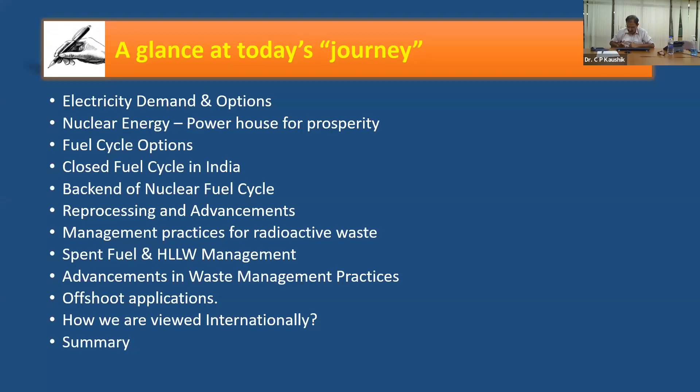And the data which I have taken from our literature indicates that even now 13% of the world population have not yet seen the benefits of electricity. And even in India, we still have 15% of the population. We have to work hard to get the benefits of electricity to reach them. That means there is still a great difference between the supply and the demand.

Maybe just an interesting slide. See, in 2018, coal contribution was 61%, and now the data which I have collected shows that it has reduced to 53.6%. That means that if I take India as one family, efforts have now been seriously put by the Government of India and all together to reduce the carbon footprint by choosing an option.

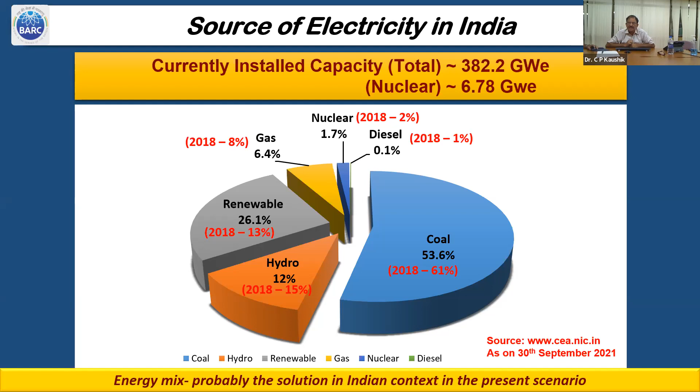And you will see our solar and all, they have comparatively increased. Like your renewable, if you see 2018, it was around 13%, and there has been a steep rise up to about 26.1%. And accordingly, although there has been no decline as far as your current installed capacity is concerned, percentage-wise, yes, there has been a marginal reduction because others like your solar and all increased. So comparatively, you find from 2 to 1.7%, but nevertheless, current installed capacity has been the same, rather it has been a little more than earlier what we had.

Now, again, this slide also indicates the urgent need of electricity. Although all of us are aware, still I thought, let me just show that if we aim at around 9% growth of GDP, maybe a decade later, say now we are in 2021, and if you look at 2031 or 2032, we'll be needing a total electricity of around 800 plus gigawatt electric.

And if you look at the renewable part, to the best of our understanding, we may reach around 250 or so, although a lot of efforts are being put. But I know all my mentors and all the listeners are aware that still in renewable, we have to work with respect to storage, with respect to transmission. I'm talking about the solar part. With the best efforts, the present speculation indicates that in a decade, we may not have a miracle, but nevertheless, there will be a steady increase, somewhere around 250 or 300 gigawatt electric from renewable.

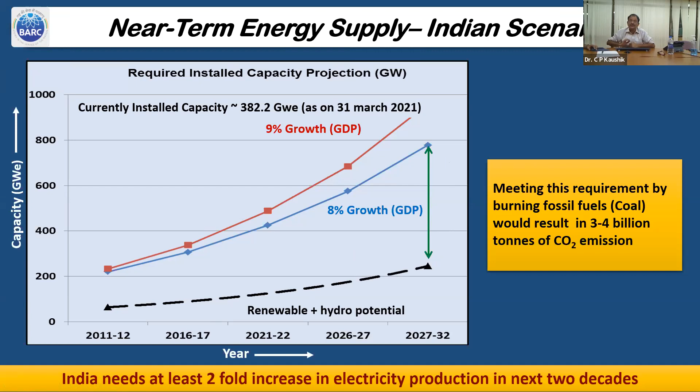So the gap of 800 to 300, from where will it come? If the gap has to be met by thermal, then it is equivalent to pumping around 3 to 4 billion tons of carbon dioxide into the atmosphere. That means a huge amount of carbon dioxide will be getting pumped, and all of us are aware of the repercussions of carbon dioxide coming into the atmosphere, resulting in what is called global warming, increasing the temperature of Mother Earth.

Now, global warming has not been just a concept, rather it is now reality. We have now started seeing the signature in reality. If you look at the first graph and the steep rise in slope in the last some 30 to 40 years, although the magnitude may be less than a degree Celsius, it makes a very clear message that during our industrial revolution in the last 50 years, we are paying the price

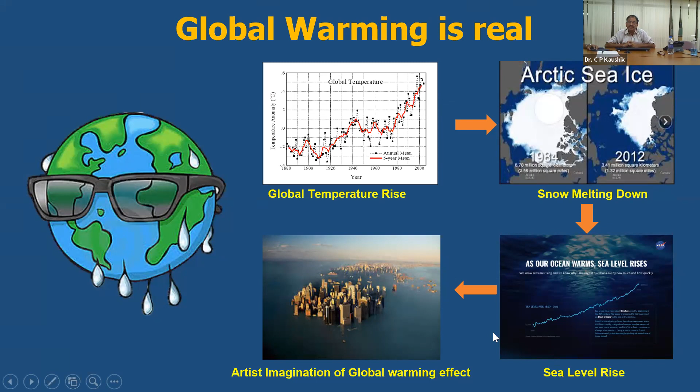of increase in temperature, and that is primarily because we have been mainly banking on thermal power, having more CO2 getting pumped into the atmosphere, which eventually results in melting the ice, and then the water level of seas will go up, and coastal area sites will have a serious problem. Now, this has been known for a long time, nothing new in it, but nevertheless, now we have started seeing the real part of it. And the seriousness has gone international as well.

I am very sure my worthy members must be knowing that this year, the Physics Nobel Prize has been conferred on the gentlemen who have been very closely associated with global climate change work, particularly with respect to modeling. And the right-hand part indicates that the sea, the atmosphere, the glaciers, and the green part are very closely interconnected, and deviation in one has serious repercussions in the others as well.

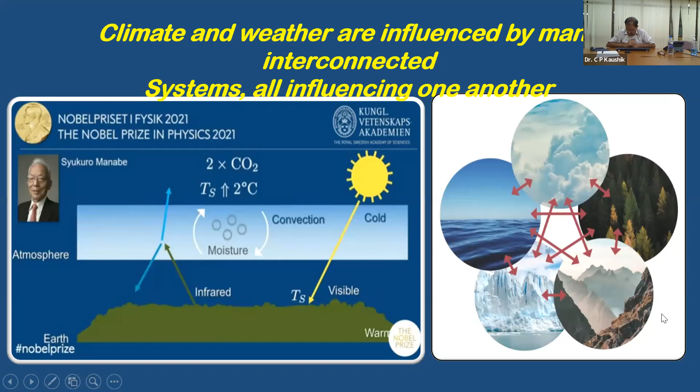Now, recently, I am very sure all of us are aware that COP26 has been held in the UK, in Glasgow, and there our Honorable Prime Minister of the country made a very ambitious and good statement that we aim by 2070, with an all-out approach and the best efforts, to get net zero carbon emissions.

And the American Nuclear Society also made a strong emphasis: we urge delegates to recognize the inherent advantage of emphasizing nuclear technology for industrial process heat, hydrogen production, and desalination. To achieve decarbonization as rapidly and as efficiently as possible, governments and policymakers must implement technology-neutral, performance-based climate and energy policies that treat all carbon-free energy sources fairly and equally. Nuclear must be treated on a level playing field with other clean energy technologies.

This I have taken from the literature and put as it is. So this is straight away coming from what I have noted from our American Nuclear Society's members. Similarly, the Director General of IAEA has also strongly emphasized that nuclear energy is a prominent alternative to tackle climate change by

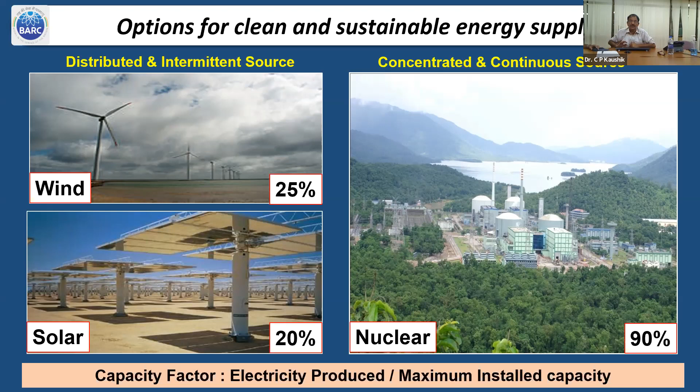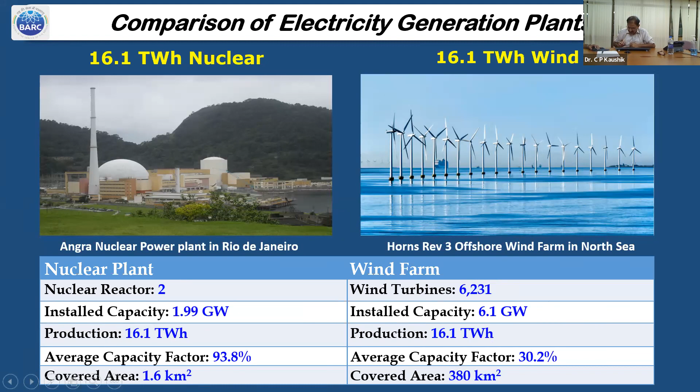Just to appreciate this particular slide, for the sake of comparison, again taken from the literature: for a nuclear plant, say 2 reactors, with a capacity of 16.1 terawatt hours, and the same from wind, you would need wind turbines of the order of 6,200. The nuclear installed capacity is only 1.99 because the capacity factor is 90% or so. In wind you have to go more, and the covered area is only around 1.6 square kilometers. On the other hand, wind will take more. All of us are aware that there is a distinct advantage in going for nuclear.

And now, apart from energy production, although all my worthy members know about it, we split atoms for the progress and prosperity of the nation. That means apart from nuclear energy, nuclear technology is touching our human society in different spheres: health, food, water, environment, national security, technology, and industry.

And as Manchanda sir, Vice President of INS, has been talking about, a book was recently published on Founder's Day about non-power applications of nuclear technology. I had authored 2 chapters there. One is wealth from waste, and another is nuclear batteries. So what I'm trying to tell is that there are enormous non-power applications of nuclear technology as well.

Coming back to the 3-stage program, envisaged by the founder of our nuclear energy program in the country, Dr. Homi Jahangir Bhabha, the aim is very clear: we wanted optimal utilization of whatever resources we have. So we started with stage 1, natural uranium-based PHWR reactors, with a closed fuel cycle so that we can extract another fissile material, plutonium-239, which can serve as fuel for the second stage, our fast breeder reactor programs.

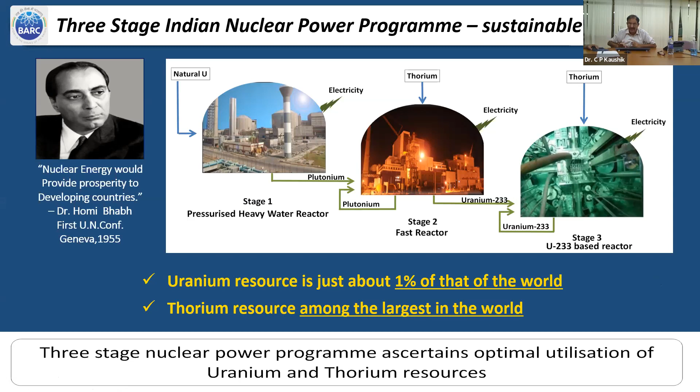And for the sake of continuity of today's lecture, let me introduce that both types of fuel cycles are practiced internationally, and we really respect the policies adopted by each member state. In the open fuel cycle, the spent fuel is straight away taken as waste, and in our country, because we are going ahead with optimal utilization of resources, we have gone for a closed fuel cycle. Eventually, it results in a reduction in the toxicity of the waste, and a dramatic reduction in the waste which eventually needs to go to a geological disposal facility, in comparison to the once-through fuel cycle.

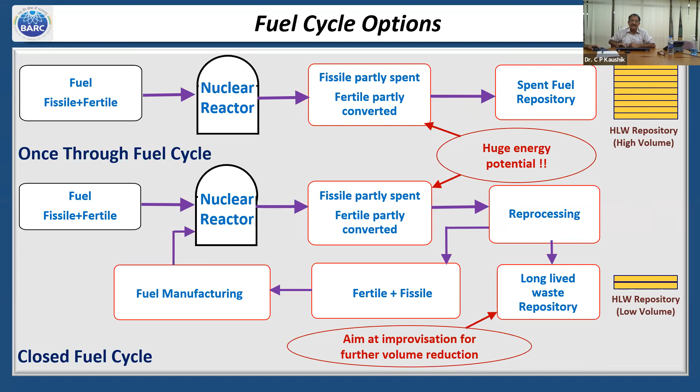And we now have decades of experience. If you look at 1956 onwards, we have 4 to 5 decades of experience in operating the closed fuel cycle, covering all stages of the nuclear fuel cycle, right from mining to reactor operations, reprocessing, and waste management.

So again, something similar: we take the fresh fuel, put it into the reactor, spent fuel comes out, and we go for reprocessing as part of closed fuel cycle options, the closed fuel cycle approach. And then we recover the unused uranium, and the fissile material obtained because of the neutron activation of uranium-238, and that again serves as fuel for future reactors. And then we are left with a solution containing a high amount of radioactivity.

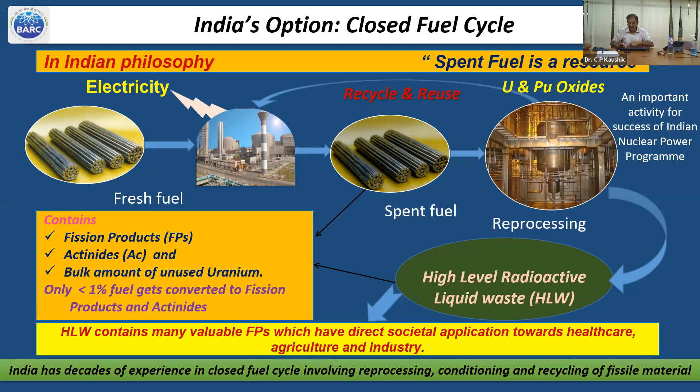Just to mention, we are still going ahead with an ambitious program which our mentors have foreseen. Now we have under planning around 13 reactors, under operation around 6850 megawatt electric, and also under construction. So as on date, we have an ambitious program to go ahead and enhance our contribution to overall energy production, following what is called the energy mix — getting energy from all resources, and preferably moving toward options with reduced carbon footprint, if not zero.

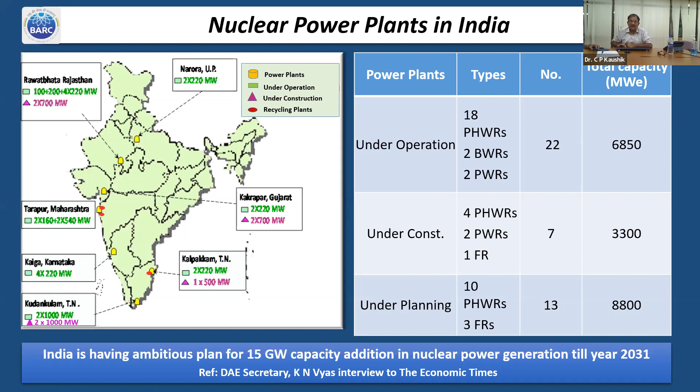Now coming to the back end part — when we say back end, essentially we are talking about fuel reprocessing or recycling, and waste management. So the key considerations are conservation of natural resources, optimization of waste management processes and disposal conditions. Is it possible to reduce the waste volume to the extent that the footprint of our disposal system can be reduced considerably? And then we have to make sure of the minimization of environmental impact.

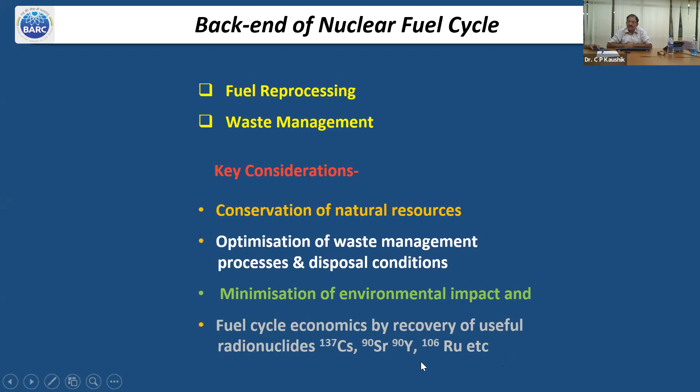And then, is it possible to drive the fuel cycle economics by recovery of useful radionuclides? To mention a few: cesium-137, strontium-90, and ruthenium-106, and many others which I have not mentioned intentionally.

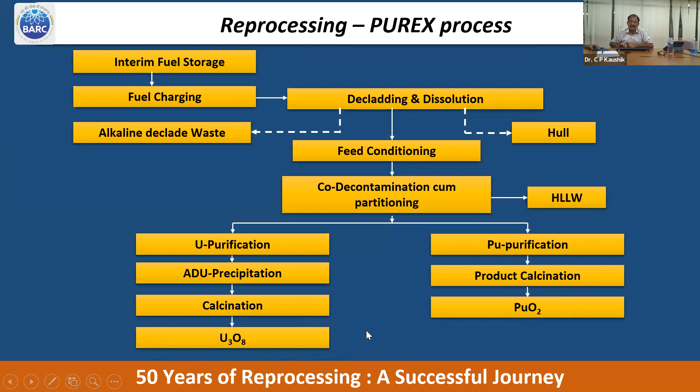As far as reprocessing is concerned, we still rely on the well-known, internationally practiced PUREX process. After interim fuel storage and cooling, we go for charging, then decladding and dissolution, depending on chemical or mechanical decladding. If mechanical, we get separate hulls out of it. If chemical decladding — as in the case of a research reactor — we are left with what is called alkaline declad waste. Then we adjust the valency of uranium and plutonium, and go for the well-known co-decontamination partition cycle, followed by purification of uranium and then plutonium, their precipitation, the calcination cycle, and eventually end up with the respective oxides for further use as fuel.

We have reprocessing plants, and thanks to our mentors, way back in almost 1964, we had the first operating plant, and then we had PREFRE, and then we have KARP at Kalpakkam. We had now second plants at Tarapur and then at Kalpakkam as well.

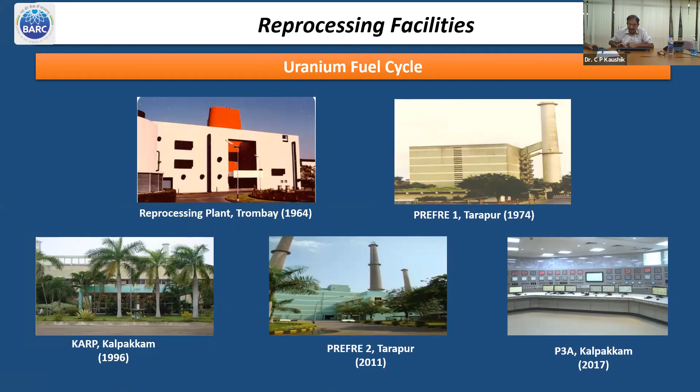We have been working on advancements and improvements in terms of how to reduce man-rem consumption, and how to go for automation so that throughput can be increased. Some examples are automated spent fuel charging facilities, chopper mechanisms, and we have moved to gang choppers. Like this, we have been evolving and improving.

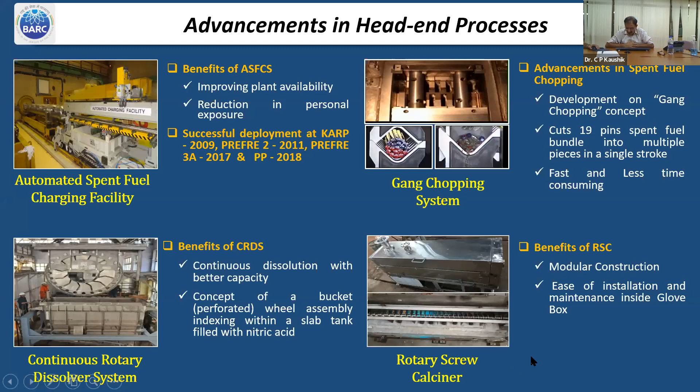Similarly, for continuous rotary dissolver systems instead of batch process, we are now improving to have continuous systems. Similarly for calciners also, from batch to rotary screw calciner. These are part of the improvements we have been working on seriously in recycling of our facilities.

One of the evolved approaches is called INRP, that is integrated nuclear recycle plant - integrated facilities. This was a dream envisaged by all our mentors, and it's a pleasure for me to be there with them, that under the same roof we have the solid-in and solid-out concept which was taught to us in our training schools. Now we have come to that stage, in the advanced stage of INRP at Tarapur, where our utilities are made common so that economics can have favorable conditions.

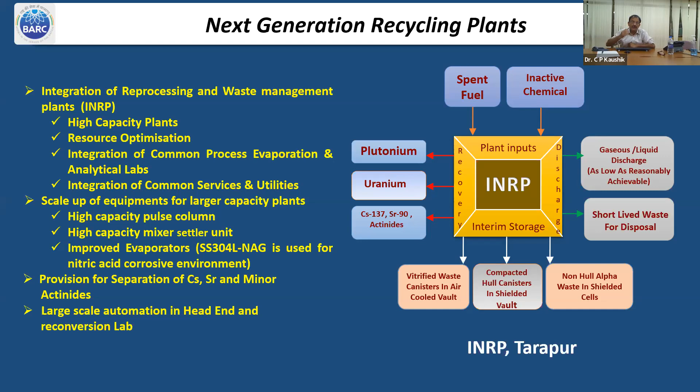We are going for high throughput so that the plant can serve in a safe and automated manner, having a reduction of our operator dependence.

Similarly, at BARC as a whole, like in CORAL at Kalpakkam, we now know how to go for reprocessing of fast reactor fuel, because all of us are aware that burn-up will be very high, something more than 150,000 megawatt days per ton. Fission product concentration will be very high.

Instead of pulse columns, we have to go for centrifugal extractors, so that contact time can be reduced, which can even save the degradation of our tributyl phosphate (TBP). But even now we are also working on whether it's possible to use other extractants like DHOA and others, so that the degradation problems associated with TBP can be reduced. Those things are all at an advanced stage of working.

We work on what is called develop, demonstrate, and then deploy. This is the mechanism adopted at our level to mature the technology prior to going for plant scale, of course after having deliberate regulatory review and clearance.

Similarly, we started - even now we have a thorium reprocessing part, for irradiated thorium. We started graduating from initially irradiating some thorium bundles at our CIRUS reactor, and later on even our other commercial reactors as well.

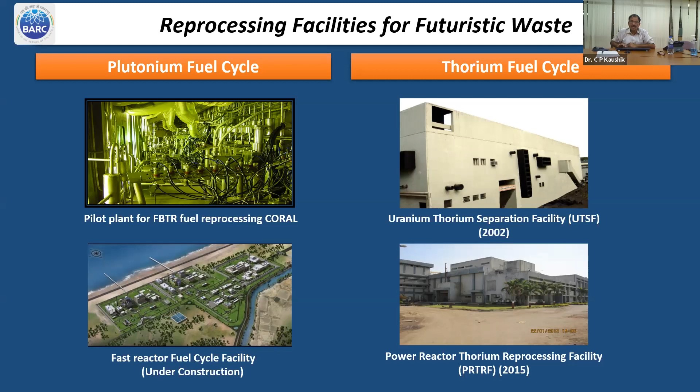Now we can say with pride that India has the technology on a commercial scale for reprocessing irradiated thoria. It is a different cup of tea compared to the conventional part, and it has changes at almost all stages, right from dissolution, because thoria being more refractory has its challenges. But it has been very successfully operated and shown that we now have in-house technology available on commercial scale with respect to reprocessing of irradiated thorium as well.

Just to show how high level waste is generated, in the future slides I will be discussing the management of high level waste, switching from recycling to high level waste.

Now, a simplified flow diagram just to indicate how this HLW is generated. From chopped fuel, it goes to the dissolver. From the dissolver, as I mentioned, we go for valency adjustment and then a pulse column, which will extract uranium and plutonium, leaving behind what is called the HNO3-containing stream with fission products and actinides - we call this the first cycle raffinate.

To reduce the volume, we go for evaporation. The upper part shows intermediate level waste, and the red-containing part shows the high level waste that gets generated, which includes almost more than 95 or 97% of the activity generated in the entire nuclear fuel cycle, indicating its complete complexity with respect to handling, storage, and management.

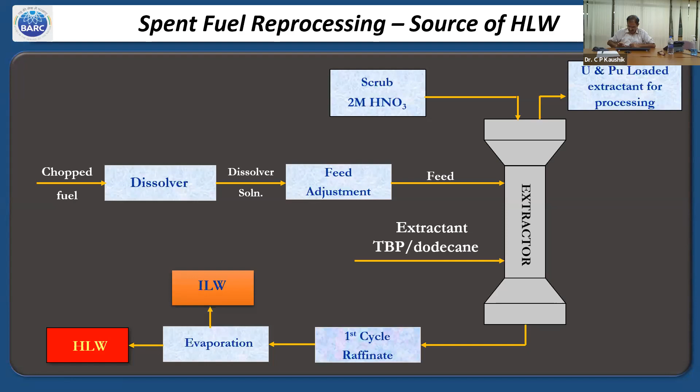If you look at the vision of our founder, Dr. Homi Jahangir Bhabha, right from the day one, right from the conception of the nuclear energy program in the country, he advised putting strong emphasis on the management of radioactive waste generated, and indicated that the practices being followed should be so standard that they can be emulated by others. So right from day one, good emphasis has been given to development of technology which works on waste volume minimization and near-zero discharge of radioactivity to the environment, to serve as a mool mantra in addition to recycle and reuse.

The basic philosophy is that some radionuclides have very small half-lives. To give an example, iodine-131 has a half-life of around 8 to 9 days, and there are many more in milliseconds and days. So, as followed internationally, we go for delay and decay. Then the bulk of the activity has to be concentrated and contained, conditioned in an inert matrix, and then we go for reduce, recycle, and reuse philosophy to achieve waste minimization.

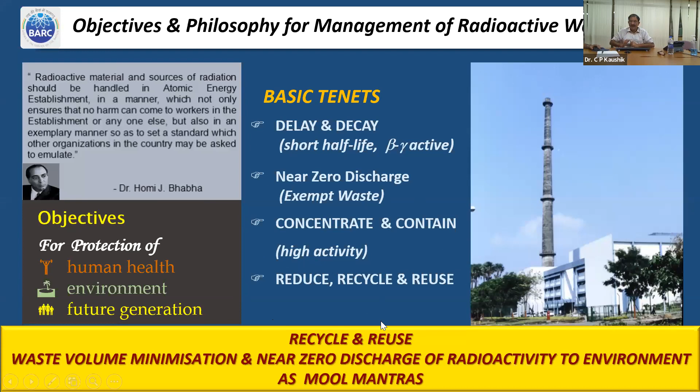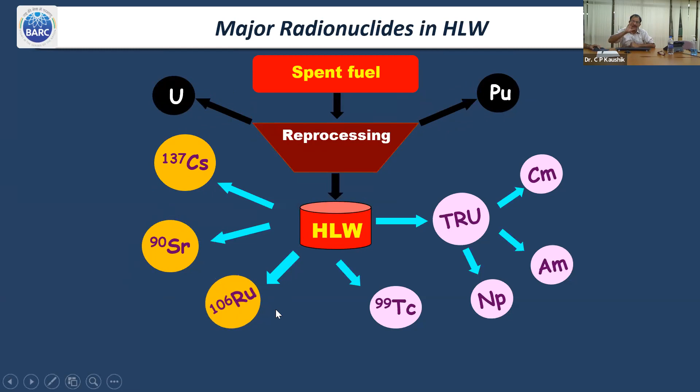Again, a simplified part - uranium and plutonium are taken out, and we have strontium, cesium, and ruthenium. This is just a representative part of the fission products. All three, and many more, have very important applications, provided we have ways and means to go for quantitative recovery, achieve the level of purification required, and put them into a form which can be used straight away by society at large.

In coming slides, I will show how these radionuclides in the waste have been recovered by indigenous efforts of the scientific community of our research center, recovered and purified in the required form, meeting all regulations, and now serving different phases of our societal life - maybe as a blood irradiator, a food grain irradiator, for therapeutic applications, and recently ruthenium-106 is being used for treatment of eye cancers. I will touch upon this in coming slides.

Coming to the actinides part, many of us are aware these transuranics appear at the bottom of our periodic table, and the special concern is that these transuranics or actinides are themselves long-lived or their decay products are long-lived. So if they go as-is along with the high level waste, whatever technique you use for conditioning, that conditioned product needs to remain isolated from the human environment for a longer duration of time - indeed, a duration which may run into lakhs of years.

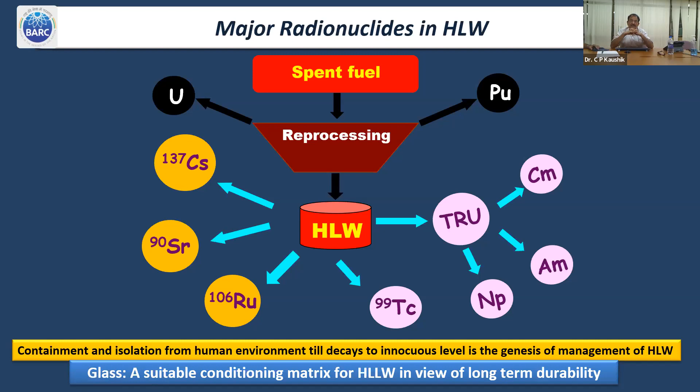If you look at high level waste, almost a complete periodic table gets represented. Some mentors from a chemistry background can appreciate that we have alkali metals, alkaline earth metals, transition elements, and non-metals in the waste, and of course lanthanides and actinides - cerium-144, neodymium-144, then neptunium, plutonium, curium, americium. So they are all in the waste.

So waste as such - that means we need a good understanding of the chemistry if we are looking for the separation of these elements from the waste and to achieve that level of purity.

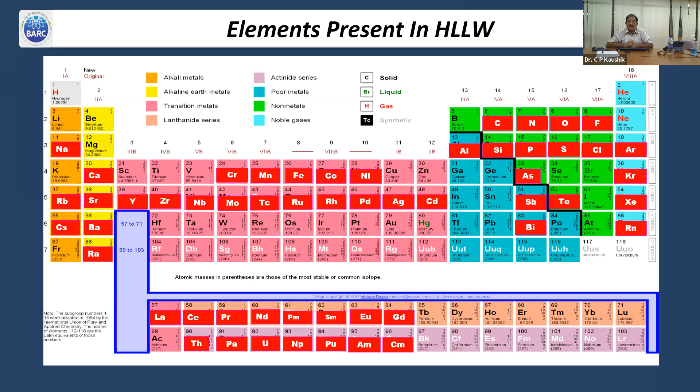Following international practices, India has also adopted a conventional three-stage policy or philosophy for management of high-level radioactive liquid waste. This involves the waste being stored in high integrity stainless steel containers underground, and then transferred to the waste immobilization plant - we have these at Tarapur, Trombay, Mumbai, and also at Kalpakkam. The waste transferred to the plant is then taken for solidification, or immobilization, through vitrification - a process where high-level radioactive liquid waste is immobilized into an inert glass matrix, and then this glass is poured.

So the radionuclides are now chemically bonded with the glass forming chemicals, and they achieve a good level of inertness, to the extent that even if they are put into contact with boiling water, radionuclides are not getting leached out of it. Once the glass is drained, a lid is put on and it is remotely welded. Then the second part: all the radionuclides are there and they are in the continuous process of decay.

That means heat will be generated on account of decay of these radionuclides, these fission products, so we have to make sure that dissipation of heat is done. So we have what is called an interim storage facility, which is now operational at Tarapur as well as Kalpakkam. Three such vitrified waste canisters are put in another stainless steel envelope, which again is welded, and then three such envelopes are put in a well qualified cask, which is taken to Tarapur from Mumbai and put in our interim storage facility.

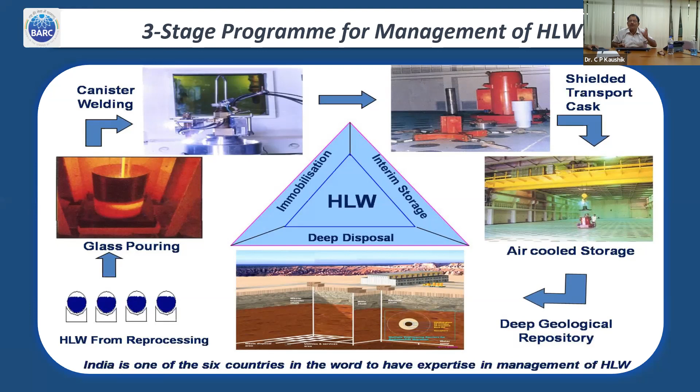And the third stage is conceptually the geological disposal facility. All our efforts in science and technology need to be made to reduce the requirement or the volume of waste which needs to go to this geological disposal facility, thereby increasing the time scale required, or whether we need it at all. Those efforts are now being put in; we'll be needing it, but the question is whether it is possible to reduce the volume to such an extent that only a very small volume is left for geological disposal.

The question is why glass? People have been using it internationally, and again there are natural analogs. In fact, nature has taught us that glass is one of the best ways to make a waste form, even near Bombay, Thane. We have taken samples from Vajreswari, which may be known to many people here, about 70 kilometers away. According to the Geological Survey of India, around 60 to 65 million years ago there were some natural events, maybe meteorites fell, and we have collected those glasses and analyzed them.

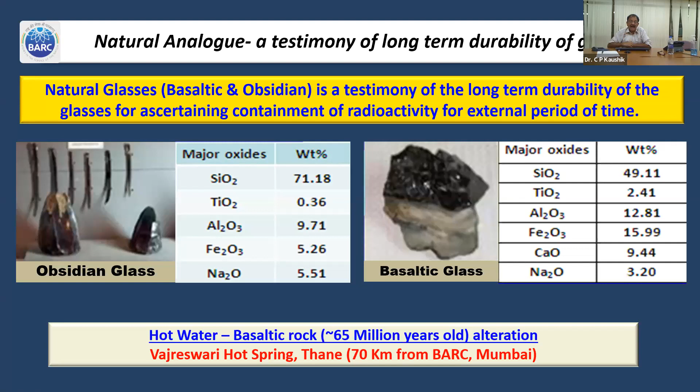We divide these glasses in two parts: one is called basaltic, one is called obsidian, and basaltic comes closer to nuclear waste glasses. When we examined these glasses, we found that there has not been much change in their integrity, although these glasses do not have radioactivity. So we have done extensive study of glasses to understand radiation induced changes, and the results have very clearly indicated internationally that glass has fairly good radiation stability as well.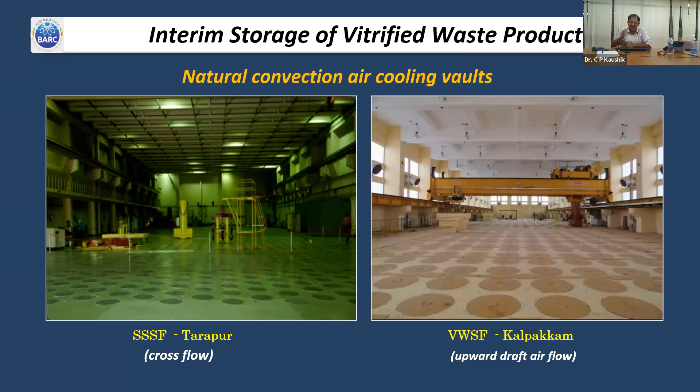This is just an example of our two typical interim storage facilities. There has been improvisation at Kalpakkam with respect to increasing the surface area, upward draft airflow, and now both are operational. Presently, because our volumes are less, hardly 15 to 20% of the area is occupied.

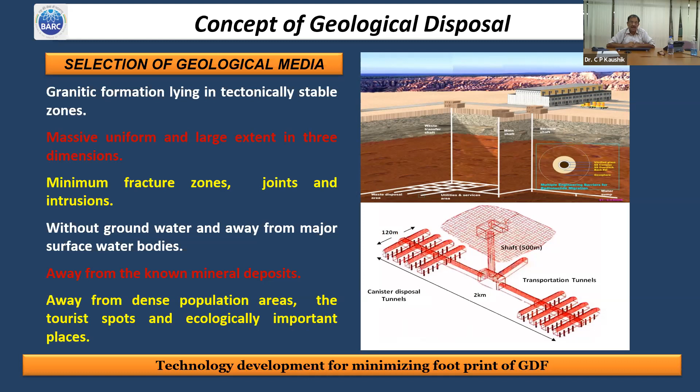And this is our work on preparing what can be the host matrix if at some point of time we have to look for geological disposal facilities. We have been investigating clays as well as granite formations in tectonically stable zones, and a lot of effort has been put in over the last 30, 40, 50 years. Even temperature effects on rocks have been studied, where we have exploited our empty gold mines. What I'm trying to say is that we have been keeping pace with world level development with respect to geological disposal facilities as well.

Now I would like to draw your attention to some of the recent advancements in waste management.

There has been improvement in the flow sheet of reprocessing. And now we don't want to add much inactive chemicals, because when we say vitrification, the waste loading, that means how much amount of waste can go in per canister, the glass will not differentiate whether the chemical is radioactive or chemically inactive. So we need to make sure that we only vitrify the radionuclides, not the chemicals.

So we have started improvising the reprocessing flow sheet and then going for partitioning. This is really one of the game changers, if I can say, in management of high level waste. And when I say partitioning, I mean we have two phases of partitioning. One, for the last 5 years we are partitioning the active component of the waste from inactive ones. Inactive ones, we have different ways and means to manage the inactive chemicals.

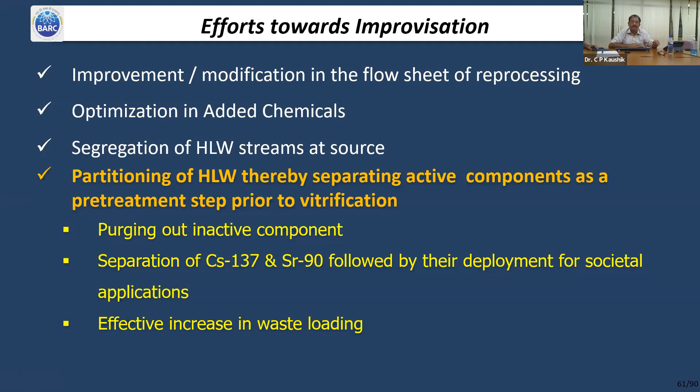So we separate the radioactive component from waste and then go for their individual ways of management. That means, if required, we can go for vitrification. But before that, if we are able to remove cesium-137 separately, strontium-90 separately, why not exploit them for deployment for societal benefits? And this also helps us to increase the waste loading. Internationally also, this is valid, not only in India.

If you look at the waste scenario, the added chemical fraction is very, very large compared to the active contribution, which is very small. The small ball, the red color part, shows the concentration of the active part is very, very small, and the inactive part is very high. Now, if you want to go for vitrification as it is, that means we largely will be vitrifying the inactive part.

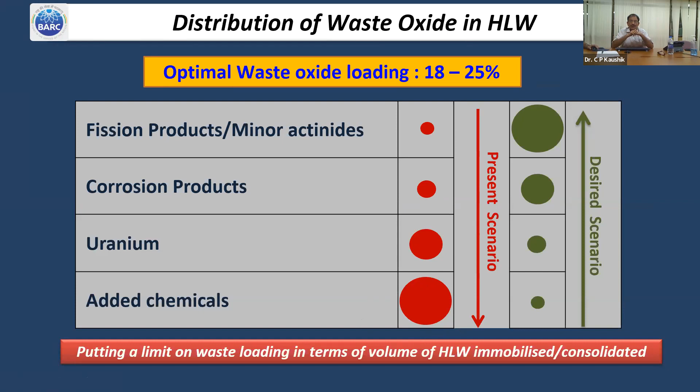And from that time onwards, we started putting our development efforts. Is it not possible to go for a reversal? Is it not possible to reduce the added chemicals? And this could be achieved in two ways. Number one, by improvising the flow sheet of reprocessing, and second, going for partitioning. The coming slides will indicate the benefit of partitioning.

So look at this, this is a well-known curve. I'm very sure all my mentors must have seen it for a long time. Now we are practicing it. This is an important change. And of course, this has been done with the guidance of all our mentors who have been indicating to start putting efforts now, soon we have to go for partitioning. The consequences are very clear.

If you do not go for any reprocessing, like in the case of open fuel cycle, lakhs of years will be required for the activity level to come equivalent to natural uranium ore. The red line, which is parallel to the x-axis, indicates the activity of natural uranium, which has been existing in the environment, and human civilization also is existing. So this has been taken as a reference point.

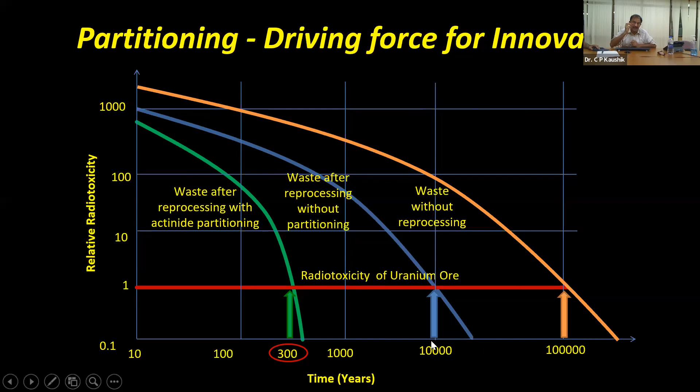Now, if you go for reprocessing, that means only uranium and plutonium, you still have to go for maybe around 10,000 years or so till the activity comes equivalent to the uranium level. But now, if you remove the cesium and strontium part separately, their half-life we know is around 30 years, go for 10 half-lives or so, and the time scale gets reduced radically or dramatically. So this graph very clearly indicates the benefits, or the driving force, for going for partitioning.

The first part shows the results of untiring efforts put in by the scientific community, some of whom are now our mentors, in actinide partitioning. This facility is located at Tarapur, and if I'm not wrong, this is the first plant in the world on a commercial scale where the process has been well established for partitioning of long-lived components, that is, actinides. And the second part is the facility at Trombay itself, which we have been operating for the last 5 to 6 years, where we are recovering cesium-137.

Let me tell you, lakhs of curies of cesium-137 have been recovered from high-level waste, and the purified cesium we have put into a specially made glass. Again, it is a borosilicate glass, which makes it impervious, and that cesium pencil is used in a blood irradiator.

And similarly, we are recovering strontium also from high-level waste. We know that strontium and yttrium are in secular equilibrium, so the recovered strontium helps to milk yttrium-90 at periodic intervals, and that yttrium-90 is then attached to a particular ligand, dotatate or other suitable ligands, which makes it a very effective radiopharmaceutical, and this has been going on regularly, maybe weekly. The yttrium-90 is being given to RMC as well as TMC for its therapeutic applications after having all the clearances from RPC, that is, the radiopharmaceutical committee.

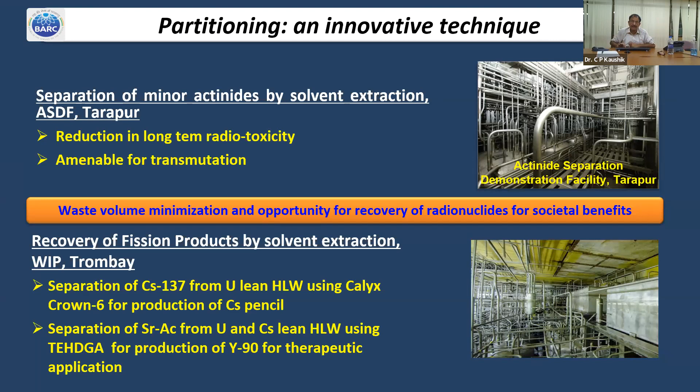And after achieving all those stringent specifications, now they are regularly serving these radionuclides for our societal benefits. And this could be possible by, again, a lot of efforts put right from our mentors onwards. They have been working and advocating our amide-based extractants because of their distinct advantage. They are popularly known as CHON-based extractants.

And we have, as we say, an approach of development, demonstration, and deployment. I remember when we developed, we started going for a demonstration extensively, comprehensively, so that we check, verify, and validate the efficacy of their use in plant scale. And then we went to our regulators, and then we got the clearance. And now, for the last 5 years, these newly deployed extractants are being used in the plant scale using mixer settlers.

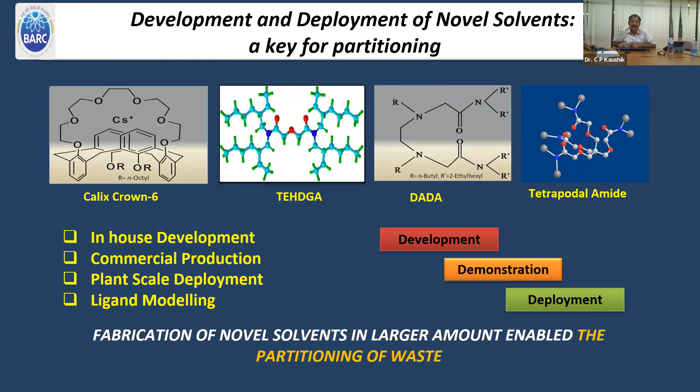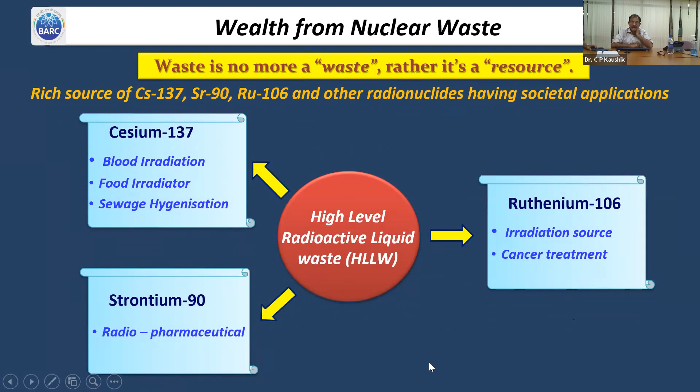And strontium-90 I told, ruthenium I will tell. I'm sure you must be aware that blood irradiation is very important for transfusion-associated graft versus host disease. And this is a typical example when the first consignment of cesium-137 was given. But now, as on date, more than 200 glass pencils have been given, and conversion of cesium into glass pencil makes it more secure and safe, because it is an immobilized cesium.

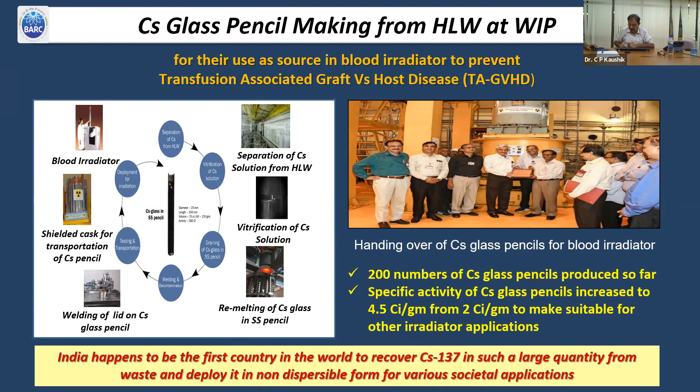Otherwise, cesium recovery efforts have been there in the world also, but probably they have gone as cesium chloride, which is a water soluble salt. So with conversion of cesium into a glass pencil, which is a non-dispersible form, probably we are the first country in the world where lakhs of curies of cesium-137 have been put into glass pencils, making it secure and safe for use at our hospitals. More than 20 hospitals in the country are using these pencils for blood irradiation purposes.

A recent example is ruthenium-106. Maybe just as a refresher for my mentors, ruthenium-106 decays to rhodium-106. It has a half-life of around 1 year, 368 days or 371 days. And this rhodium decays to palladium-106. The beta from rhodium to palladium is a pure 3.54 MeV beta, which makes this one of the unique radionuclides for eye cancer treatment.

And let me tell you here, sir, for ruthenium-106 with deposition, there is only one company in the world supplying this source, Messrs. BEBIG in Germany. They have been supplying different parts of the world. In India also, our leading hospitals, including AIIMS and Sankara Nethralaya, were all importing it, and one plaque was costing of the order of 13 to 14 lakhs for eye cancer treatment. That means the treatment was not within striking distance of the general public at large.

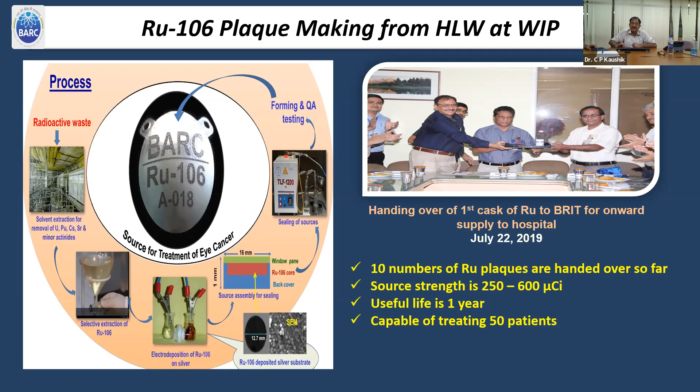Now, this particular notable contribution from BARC has really made a sea change in the treatment of this particular type of cancers, where the ruthenium-106 could be recovered and electrodeposited on silver plaque. These silver plaques we handed over some 2 years before, in July 2019, the first consignment, and we gave it to different hospitals, including AIIMS Delhi and Sankara Nethralaya, and they have used these plaques and found their experiences wonderfully well. They are mentioning that it is behaving at par or even better than what was being imported earlier.

And the examples are like this, from Sankara Eye Hospitals. We really appreciate and acknowledge their contribution, and we have taken their permission to show these slides here. This is the eye before the treatment, and after treatment, look, the patients are doing very well as per the doctors.

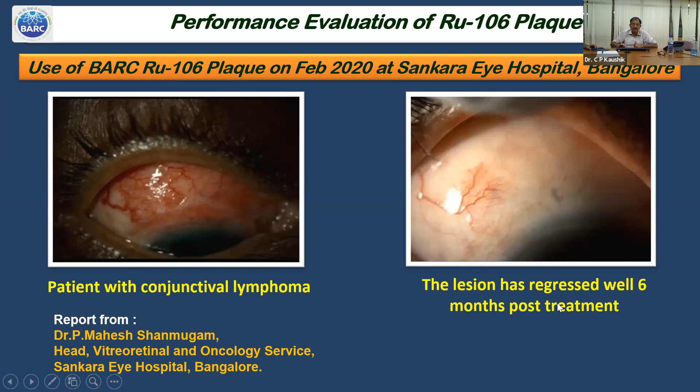And look at a very recent one, in 2021 only, maybe somewhere April or May, army hospitals in Delhi have also procured our plaques, which after all the clearances from our AERB we have given to army hospitals, and they could salvage the vision of a child using the plates given by BARC of ruthenium-106.

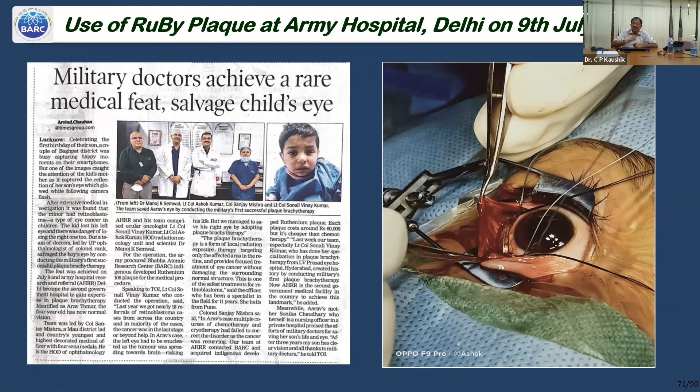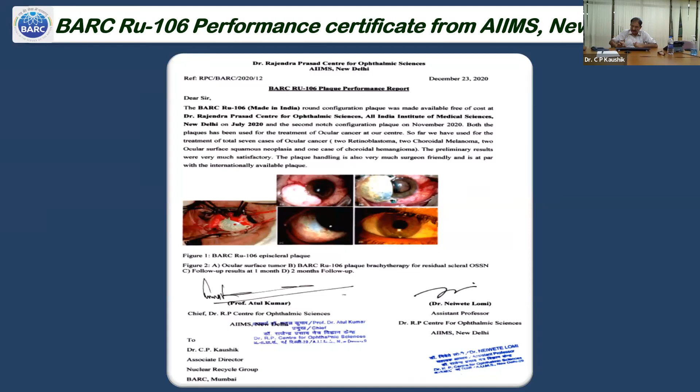This is again some sort of a certificate, I can call it. This is the performance evaluation by AIIMS, and they are very clearly indicating that they are finding these plates at par with the internationally available product. And this again has been one of the package: this simulator which has been programmed along with the plate. This helps beginners, practitioners, doctors or oncologists to decide the optimal dose depending on the tumor size, the radiation strength and all. So this also we give along with the ruthenium plaque.

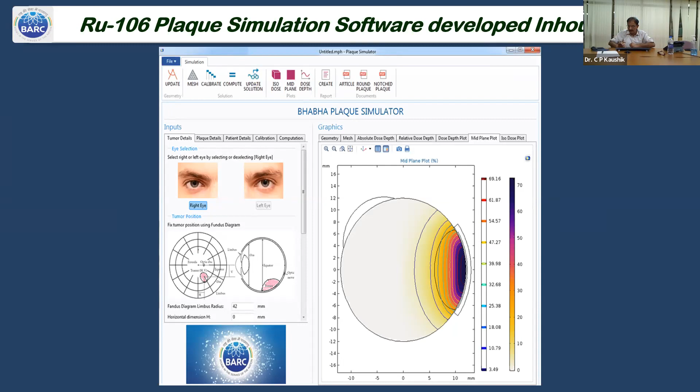And let me tell you, sir, now we are getting requirements from some of the developing countries also. BRIT has been the common window, as we all know, since this particular technology has been given to BRIT, and BRIT is now getting inquiries from some of the member countries and other developing countries also. So now we are opening the door for export of this. This is an important contribution to the Atmanirbhar Bharat and Make in India concept as well.

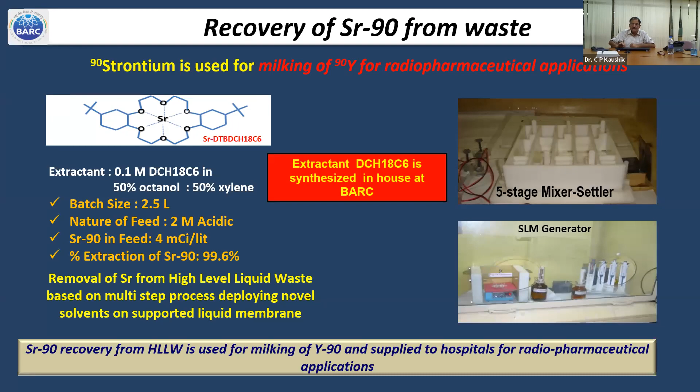Similarly, Yttrium-90, which I was explaining, has also been in use, and recovery we have been giving. Now look at an important part, maybe another 10 minutes I will take. Take as basis 1 gigawatt year electric. I repeat, 1 gigawatt electric, this I have taken as a reference. If I go for direct vitrification, the way we were going earlier, I will land with something like 7,500 kgs of vitrified waste product, which will have 19 canisters.

If I go for partitioning of active components, the way I was telling, only the active components can be separated. And if I assume that I don't need cesium, I don't need strontium, I have to vitrify every radionuclide, then we will be ending up with 3,400 kgs of vitrified waste product, which will have 9 canisters. This includes all our long-lived components also.

Now, if we go for partitioning, see, in between I have written by 2025 in the second part itself. This partitioning has already been established. We are practicing it for the last 5 years in Trombay. The same thing is now being put at Kalpakkam. So here we are indicating that by 2025, this will become an essential pre-treatment step at all our waste management plants in India, and at that time our volume will reduce to 3,400.

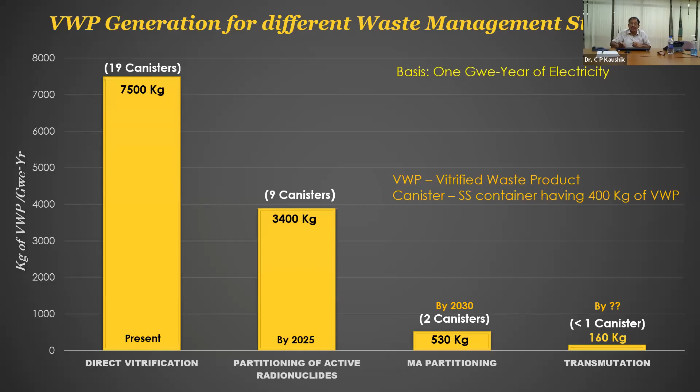Because 160 kg, you divide by the density of glass, which is around 2.5, it will be less than a canister. So if you look at this part, it clearly indicates the effect on footprints, the impact partitioning can have on footprints, which can really change the scenario of our geological disposal systems in India.

Now look at a typical part. If I decide X as the size of a repository, and if I adopt minor actinide partitioning by 2030, then one repository of size X will be needed beyond 2240. If I go for inactive, that means I remove only the inactive part and don't go for active partitioning, I will be needing a repository of 5 times the size of X by 2102. And if I go for direct vitrification, even by 2083, I will need more than 10 times the size of X.

The X I have not defined, I have not mentioned here intentionally, because the idea was to give a picture of the extent of impact of this partitioning on the footprints of a geological disposal system. Innovations in waste management have led to recovery of valuable radionuclides for societal benefits, realizing wealth from waste, thereby changing the thought pattern of the public at large.

In order to delay the repository, when we need the repository, we are working on it, because presently we have a good maturity level with respect to the PHWR part. We are working on the waste coming from fast reactors, because there will be a different set of challenges. We are aware of it and we are working on it. I'm very sure we will have partitioning for the fast reactor as well. Present experience is on our PHWR reactors, and efforts are there as part of ADS as well as for fast reactors.

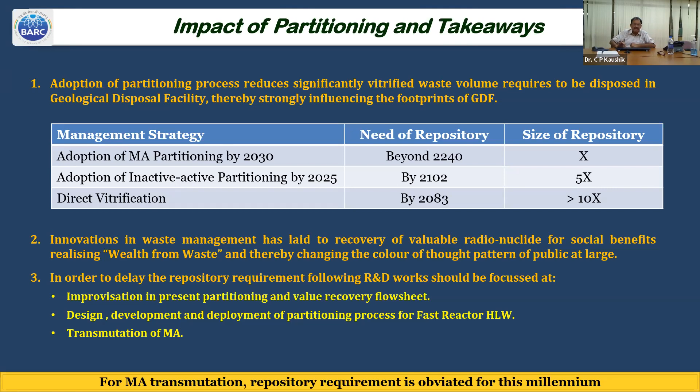Fast reactors are going to come, and there we will try to see the extent of burning of these parts in fast reactors. And of course, transmutation in ADS, we have an ambitious program and the work is going on. Presently I'm not taking any account of this to start with, but yes, transmutation is an important part of this.

How could we achieve all this success? There is what is called systems engineering. It's an interdisciplinary field of engineering and engineering management: how to design, integrate, and manage complex systems over their life cycles. One circle is application of domain expertise. Take the example of partitioning. We need domain expertise, which includes development of in-house extractants, whether it will achieve that level of selectivity, and whether the extractant will have the required irradiation stability.

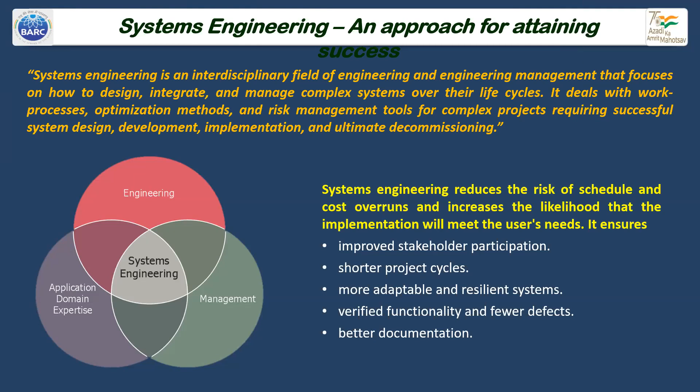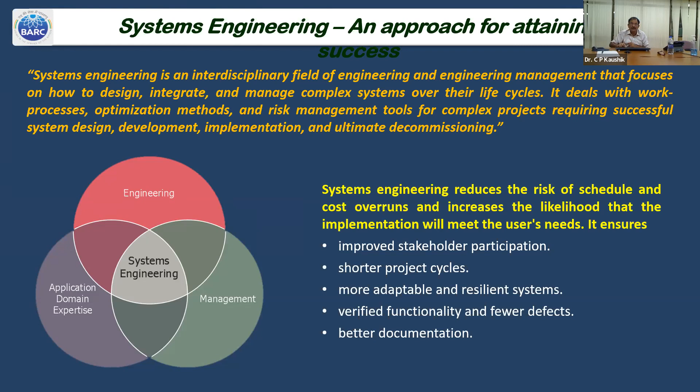Then it goes to the engineering level, which includes optimization of parameters, like which engineering equipment I have to use. So we have been working, and thanks to this integration, the stakeholders include our regulators also. This type of concept helps a lot in achieving successes in our complex systems.

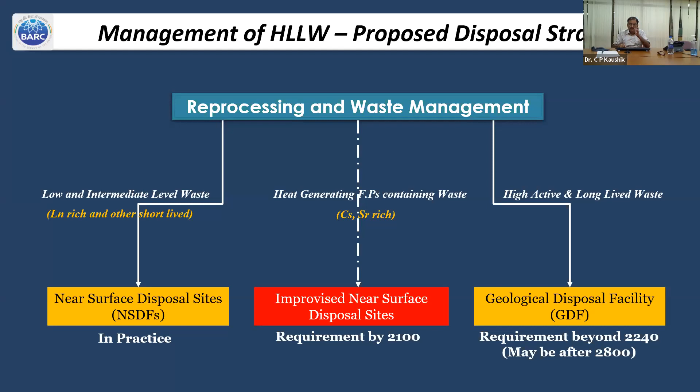So in reprocessing and waste management, we have a near surface disposal facility. Now we will have improvised near surface disposal sites, because we'll be putting cesium and strontium rich waste there, and our conventional NSDF may not be the most suitable. So we have started studying improvised near surface disposal facilities. The geological disposal facility is far away, because our volume will get reduced immensely with religious adherence to the partitioning program, even by 2030. Now I'm showing some slides of how we have advanced from our metallic melter to our cold crucible.

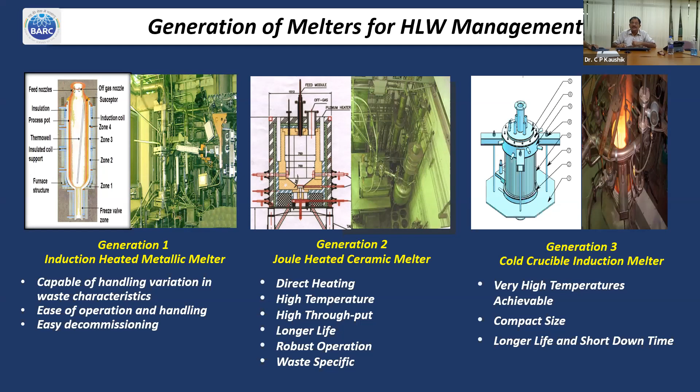Recently we know that joule heated ceramic melter is being used at Tarapur and Kalpakkam. We are aware about the challenges, and now cold crucible commercial operation has been done at Trombay in presence of our Tarapur staff, and soon one unit of cold crucible is being transported to Tarapur. To start with, they'll be going ahead with vitrification of intermediate waste to get hands-on experience prior to it getting matured for high-level vitrification.

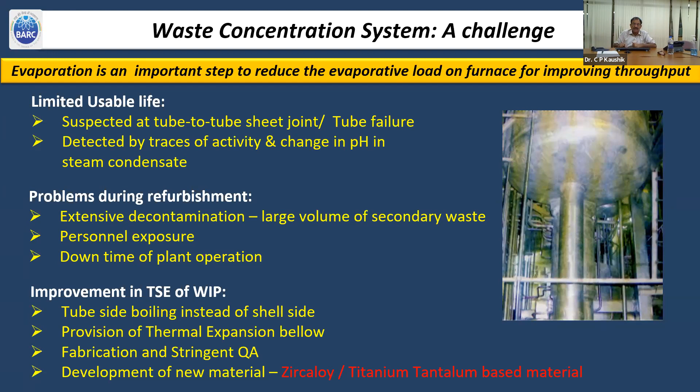Challenges we have been covering with respect to evaporators also. These evaporators are an integral part of our recycling as well as waste management, and they have limited usable life. We have been working on extending the usable life, which includes improvisation in material QA, as well as new materials based on Zircaloy or titanium to replace the present parts, so that usable life of these can be improved.

One of the important aspects is our remote handling gadgets. They play a very important role, because if I call it a cesium pencil, it's very precise. To give an example, the height is around 20 centimeters, the diameter of this pencil is around 2.5 centimeters. We had to weld it, qualify that weld, do very precise work, and the radiation level of a single pencil goes as high as around 10,000 R.

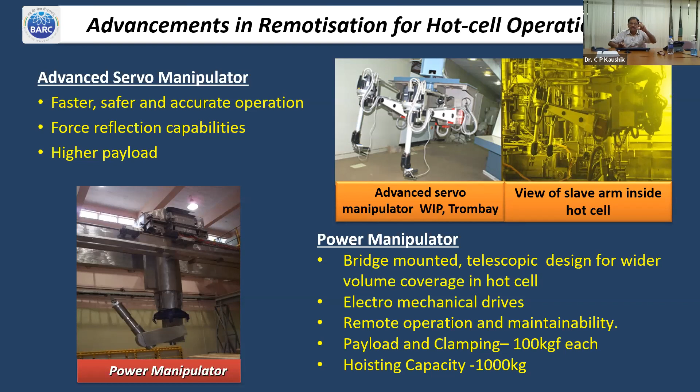So needless to mention, they need to be in a hot cell, and for that we have to bank on our customized remote handling gadgets, which we call servo manipulators, very important for precise work. But now we are also going for bulk requirements, so we are going for a power manipulator as well. These two really help a lot to maneuver operations inside the hot cell, including welding of a cesium pencil to meet our regulatory clearances.

Similarly, our hot cell is like a football ground, maybe 40 meters in length and around 12 meters in width. Our window, including the radiation shielding window, cannot allow us to have a look at all parts, so we have put cameras at different locations within the hot cell.

Needless to mention, these conventional cameras get severe radiation damage and need to be replaced very frequently because of high radiation, and every removal was at the cost of downtime of the plant as well as high maintenance consumption. So we have made improvements. We have started working on what is called periscopic based cameras, where cameras are outside the cell and there are glass prisms inside, which do not have that level of radiation damage, and we have put in the in-cell crane, which has been really very helpful in enhancing usable life.

We have also been working on what is called radiation hardened materials and electronic systems, because CCD parts have quite frequent radiation damage. Here also we have made important contributions, or improvements, and now we are encashing the benefit in terms of usable life.

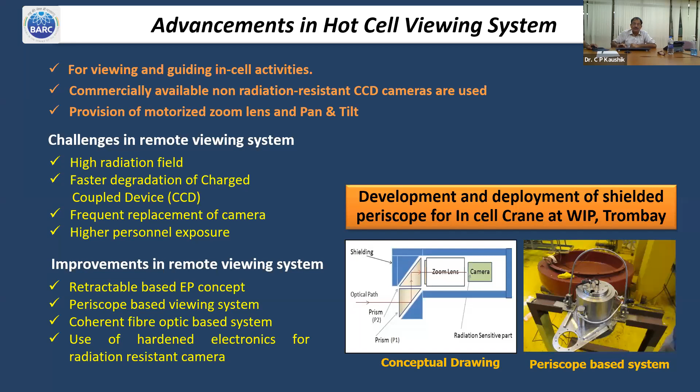Coming to the low level part, near zero discharge has been one of the motives, and we have gone one step ahead: waste to water. This year, we have aimed that 50-meter cube of waste, whatever the activity, after almost reaching BDL type, that water - I'm not now calling it waste - will be recycled back for use. So it's a waste to water approach.

Earlier we have been working on what is called chemical treatment, but it has its own limitations. Now we are working on a hybrid process, which comprises reverse osmosis, selective absorbents, and of course our conventional chemical treatment. So this hybrid process really helps to get the activity below, sometimes below detection limits, resulting in achieving not only near zero but a waste to water approach as well.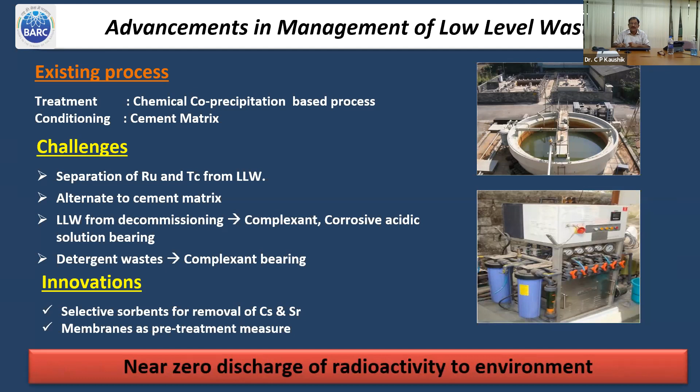Now, coming to solid waste, conventionally we have been compacting and so on, but in the last 3-4 years, we have gone for what is called plasma assisted incineration for polymeric and cellulosic waste, which constitutes a good amount of the solid waste annually generated. This plasma reduces the waste into very small ash, so the volume reduction factor becomes very high.

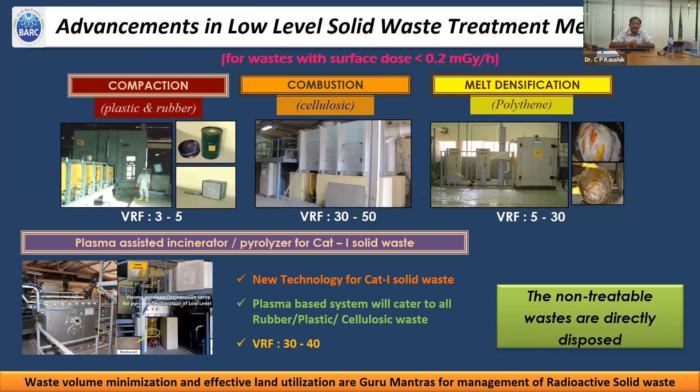I'm sure my worthy mentors are aware that conventional incineration of polymeric waste releases toxic gases like dioxins and furans into the environment. But with plasma, where we achieve high temperature, these dioxins don't come out, they get destroyed. This has been in use at Trombay, and based on encouraging results, it's now being implemented at Tarapur and Kalpakkam as well.

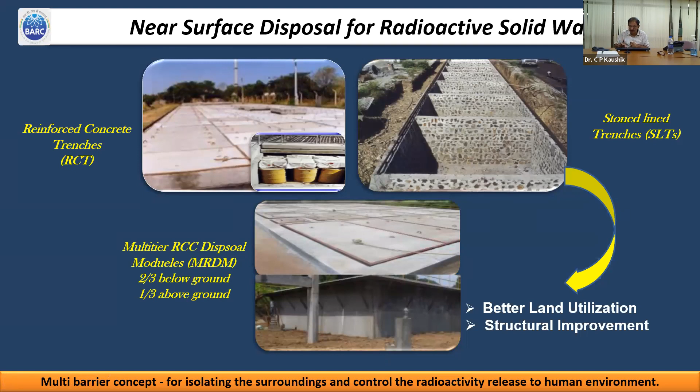Offshoot applications: looking at plasma incineration, take the example of municipal solid waste. I'm sure all of us are aware of the poor condition of municipal solid waste management in the country. Presently open pits or open incineration is practiced, and we're all aware of the consequences of open incineration. This plasma assisted incineration can go a long way to help with this.

Internationally it has been adopted, and building on our small 50 kg per hour capacity plant at Trombay, we have now gone for a model plant at Tarapur to try municipal solid waste incineration. We've been working with both our DAE units, BARC and IPR Ahmedabad, putting together plasma torches. The concept is now in the DPR, documents are in the regulatory process, and we are going ahead with the 50 kg per hour model plant, because we know municipal solid waste has calorific value.

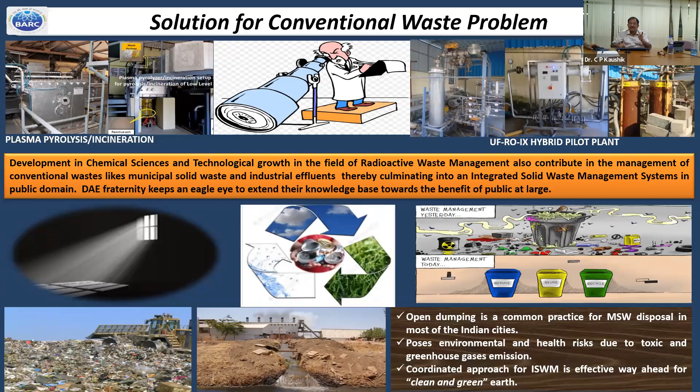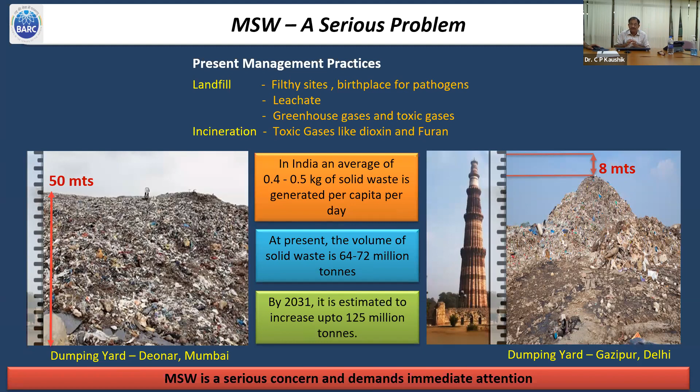Given the condition of our municipal solid waste, plasma can help. Of course we need to make it economical and cost effective, but the science and technology need to develop first. We all know initially mobile phones cost 15,000 or 20,000, today even 2,000 gets you one. So the cost effective part we look at later. Presently I'm talking about developing the technology, and BARC is working at Tarapur to try and utilize the calorific value of municipal solid waste.

There is a plant near Pune, and I had an opportunity to look at it. The heat from the calorific value of municipal solid waste is used to run an evaporator, converting water into steam, and that steam is used to evaporate chemical hazardous waste. So the calorific value can be utilized for meaningful purposes. Of course we have to mature to that level; presently we have started to make a model plant.

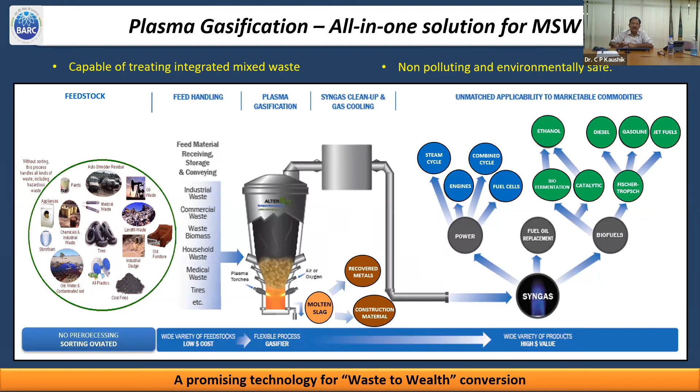Similarly for industrial effluents: when I talk about a waste to water approach, is it not possible to attempt a similar hybrid process for industrial effluents? These are all offshoot applications which we have matured in nuclear applications, and there is an opportunity to explore them for industrial effluent cleaning as well.

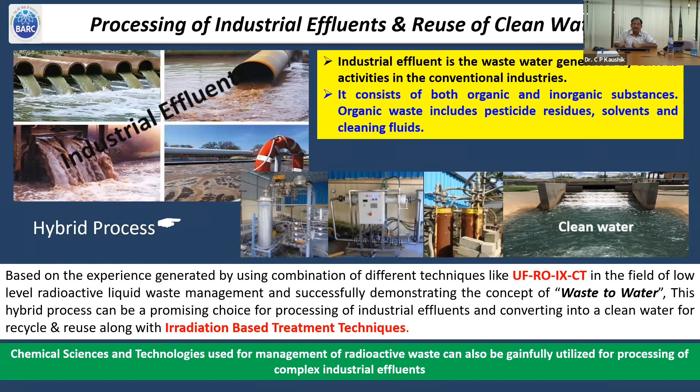Recently, in the COVID context, all of us are aware that glass fiber media has been used in our nuclear installations for almost 5 decades. I'm sure many are aware these glass fiber media are imported, maybe Lydall, one company in France, among others. Now we have made an attempt to indigenously develop this. We have prepared, and finalized, one vendor, which is now in the advanced stage of evaluation, and in a couple of months we'll have HEPA filters made from indigenous fiber media rather than relying on imported materials.

We have also done some customization to use this material in the form of masks, which have very high retention.

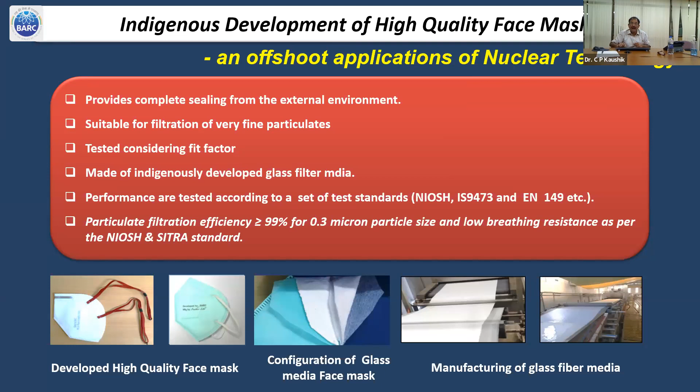That is well known, but more importantly, is our breathing resistance and other properties. So we made some changes in the glass fiber media and gave rise to our mask during the challenging time of COVID, probably the first high quality respiratory mask. It's called engineered valveless transparent mask, maybe first in the country, and it's reusable and very cost effective.

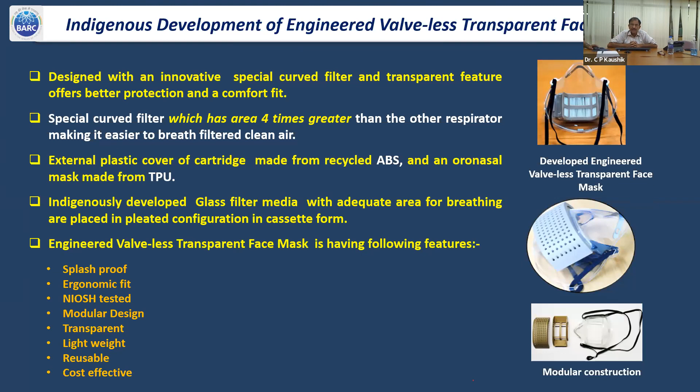Reusable means it's a modular construction. You can remove the first part and wash it, and all the materials we have used here are cleared by FDA for our use. The technology has been given to one manufacturer at Pune, and very soon it will be available on Amazon as well.

These efforts have been appreciated by all our bosses at higher levels, because during COVID we could utilize indigenous technology, and now these filters are indigenously developed. Some upcoming slides show how we are being viewed with respect to these developments. Some of the international scientific community are appreciating the efforts. Of course we have our own road to go ahead, but nevertheless our efforts are being seen internationally as well.

Our chairman, USNRC, visited and saw the uniqueness of removal of cesium and converting it to a non-dispersible form. That is important because removal efforts had been done earlier as well, but that was in the form of chloride, which is water soluble and very dispersible in nature. This non-dispersible form is the uniqueness.

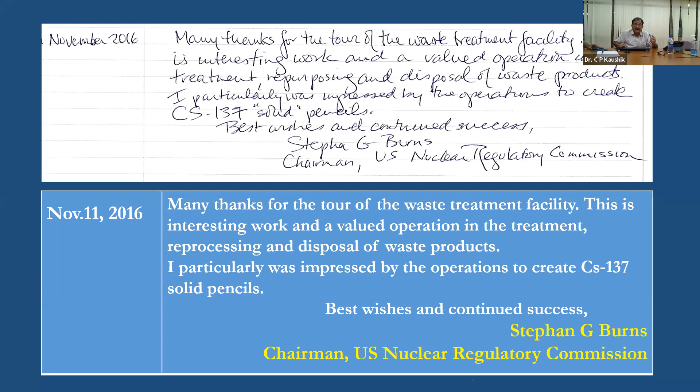I come to the conclusion part. We have five decades of experience in our nuclear closed fuel cycle, and that experience is at par with the best international practices. Reprocessing is key to going ahead with our nuclear program because of resource utilization, and we strongly believe, and have demonstrated, that it will have a dramatic effect on reducing waste volumes. We know waste management is an evolving process, and we have been learning, placing emphasis on waste volume minimization.

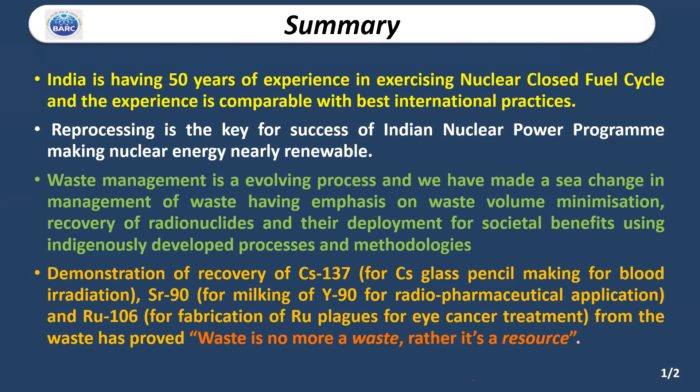We have almost established the recovery of radionuclides, which are now in the public domain for different applications such as eye cancer therapy, therapeutics, food irradiation, and blood irradiation. So now, without doubt, we strongly say that waste is no longer a waste, but rather a resource material. Our innovations in the backend have gone a long way to reduce the footprint of geological disposal systems.

Excellence in chemical science and technology, and the maturity attained in nuclear waste management, has put our country in the driver's seat globally. This expertise contributes toward improvisation and can even have offshoot applications for some of the challenging problems faced by society.

We are also trying to set a record with respect to safety, which is a result of adopting safe practices with continuous, exhaustive, and independent regulatory review. Thank you for your attention, sir.

This particular slide is quite old, and we have been emphasizing the size of this very small ring, which includes the volume of waste after partitioning. That is the waste that one Indian family would generate while exploiting all their electricity requirements from nuclear technology throughout their life, and that is the only very small volume of waste left. This indicates the importance of partitioning as well as our closed fuel cycle.

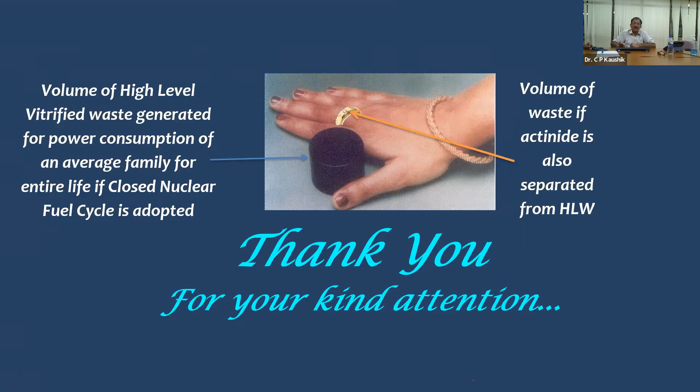We have gone through a challenging time, sir. With folded hands, I really pray to the Almighty with the well-known mantra: Om Sarve Bhavantu Sukhinah, Sarve Santu Niramaya, Sarve Bhadrani Pashyantu, Ma Kashchid Dukhbhag Bhavet. May all of us, may my mentors, may I keep on being lucky enough to have their blessings for a long time to come. May all be prosperous and happy, may all be free from illness, may all see what is auspicious, may no one suffer. With that sincere prayer to the Almighty, I come to an end.

Jai Hind. And now I look forward to the blessings and some questions from my mentors as well. Thank you very much.

Thank you, Dr. Kaushik, for that really spellbinding presentation. You really covered the entire gamut of activities, and gave us a bird's eye view of the process. The session is now open.

Ramarao, will you continue? Go ahead. I've already seen a question, a hand raised by Sri Kailash Agarwal, former Director NRG, Kaushik's ex-mentor, if I can say so. Ramarao, can I go ahead and ask Mr. Agarwal to ask the question?